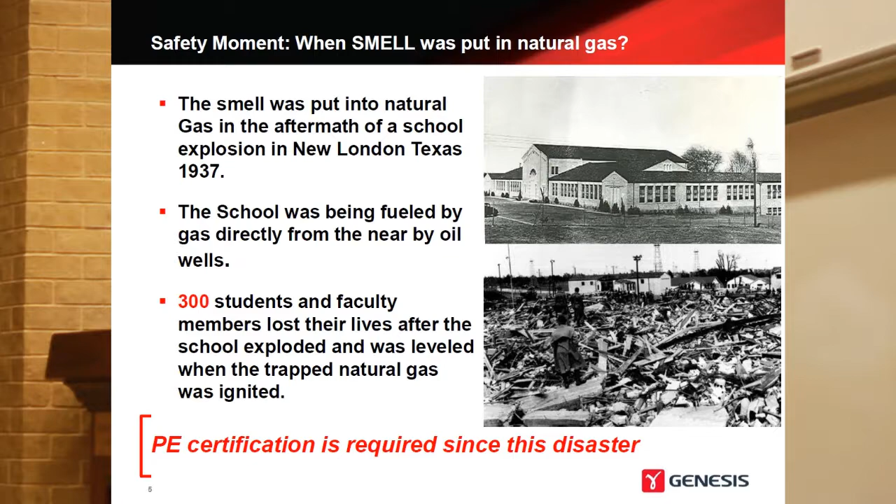It was London, Texas - New London, Texas, 1937. This is the high school before the explosion, and this is after the explosion. The school was fueled by gas directly from the nearby oil wells. That means there was a leak. Nobody smelled it, it got concentrated in certain areas, and then it got ignited, and you have an explosion. This is what happened. 300 people died. From there on, the Texas legislature, Congress, put in the Texas Engineering Act, and PE certification is required since then. Actually, nobody can be called an engineer if he doesn't have a PE here in Texas. Do you know that? Okay.

I can show you offshore accidents, the whole history, later on if you want, but we're not going to keep going with safety. If you saw safety back then, there was no safety at all. The job was done, and people were killed, okay?

This is a typical subsea development. You know what that is? What project is that? It's there, read it. What is that? For every question you respond, you get an extra ticket for the Genesis shirts, okay? The Genesis shirts are polo shirts. Let me show you that. Look, if you play golf, okay, nice. I have one for the girls, one for the boys, all right? So because we have gender diversity.

So what is that? What is that thing floating there? It's called what? Semi. All right. What are those things here and here? They call what? Say it again. They are planes, but they have a bigger name because it's where the wells are drilled. So it's called what? Drill center. Who said that? Okay, we have an extra. So Nebulisa, you need to give him an extra ticket. All right, so we have the drill centers.

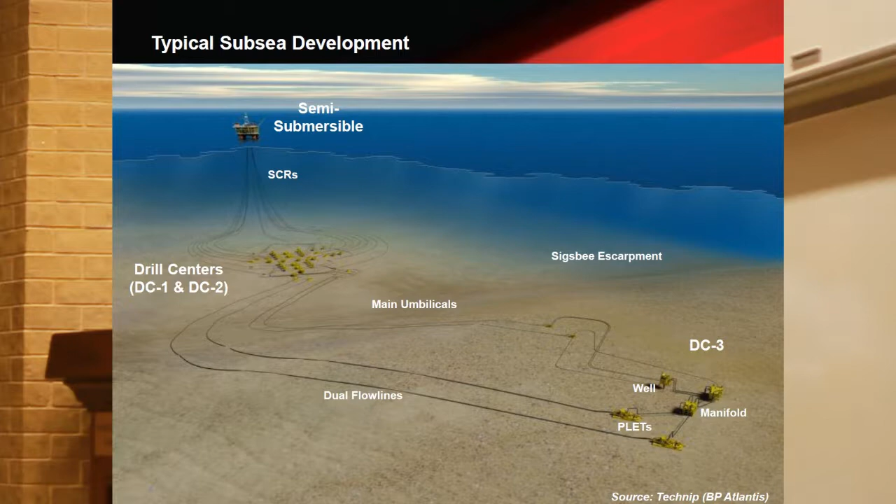There's two drill centers there next to Atlantis, and over the Sigsbee escarpment you have the DC3. These are dual flow lines, steel catenary risers, pipe in pipe, 1,800 meters water depth, quite challenging job. Wells and manifolds, and these are the umbilicals.

Subsea engineering, again another subsea project. You need to distinguish between, and then put together later on, the subsea production systems, which are basically all the well tubing and completion, the subsea trees and controls, the manifold and jumpers, and the subsea processing and boosting. All that is part of the SPS.

Actually, in the contracting strategies, many operators put that as a package, called package number 4, SPS, Subsea Production Systems. Usually their bidders are Cameron, Oceaneering, OneSubsea, Aker, GE, etc. And then you have the SURF.

The SURF part is whatever is left, and includes the subsea systems again, you know, umbilicals, risers, and flow lines. That's what SURF means. Do you know that?

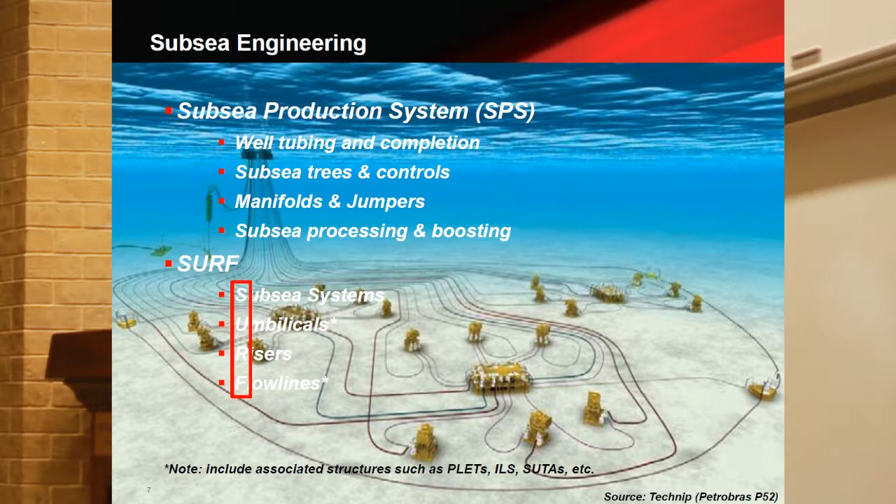SURF, they were very creative, you know, years ago about that, and actually they were trying to put the manifolds there in the SURF. But unfortunately, if they put the manifolds, what is going to happen is Smurf. And it wasn't like that, even though a few projects could be a Mickey Mouse project, could be a Smurf project, but it's not like that. So it's not a Smurf, it's SURF.

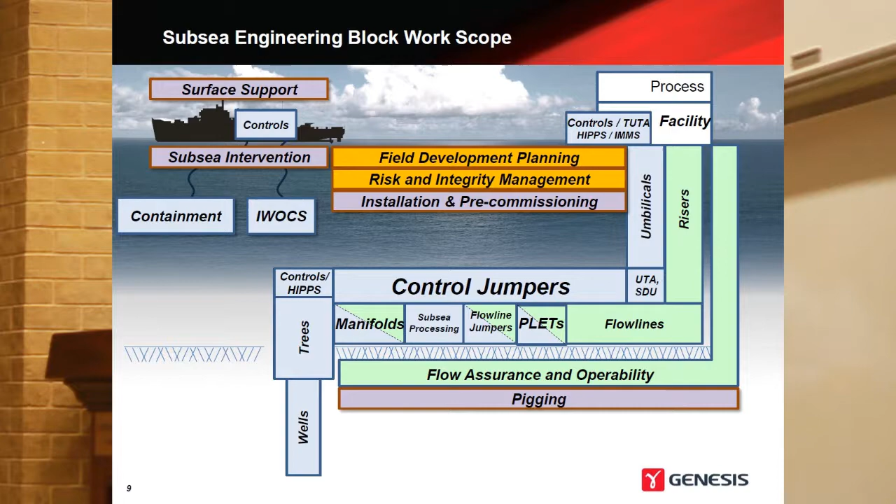This is basically the little blocks that you will have on any subsea engineering company for everything that is underwater, includes the production part, and the subsea intervention part with the workovers. You have workover risers, etc. For example, FMC does that, but they don't have drilling risers, for example.

Okay, having said that, you guys gotta tell me what upstream and downstream is. Who knows what upstream is? Upstream is all the exploration, production, extraction of the oil taken into the refinery, and downstream is when you take those hydrocarbons and transform them into something different, something useful. Do you agree with that?

Okay, so he said downstream and so we have 2 points here. So Nebulisa, he got 2 tickets. He didn't say only upstream, what midstream is, and it's correct. Usually the exploration, drilling, and production, and downstream refining, processing, and marketing is what that is.

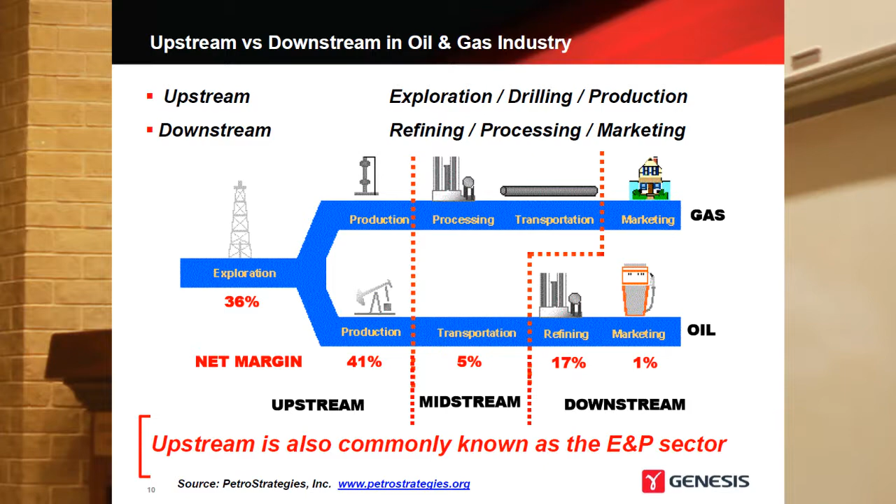Now, what is offshore and onshore? Offshore and onshore could be in the upstream business, because I can extract oil either from onshore or from offshore. Midstream usually is part of the downstream. Transportation, that type of thing is midstream, but usually we consider upstream and downstream. That's what you need to have in your minds.

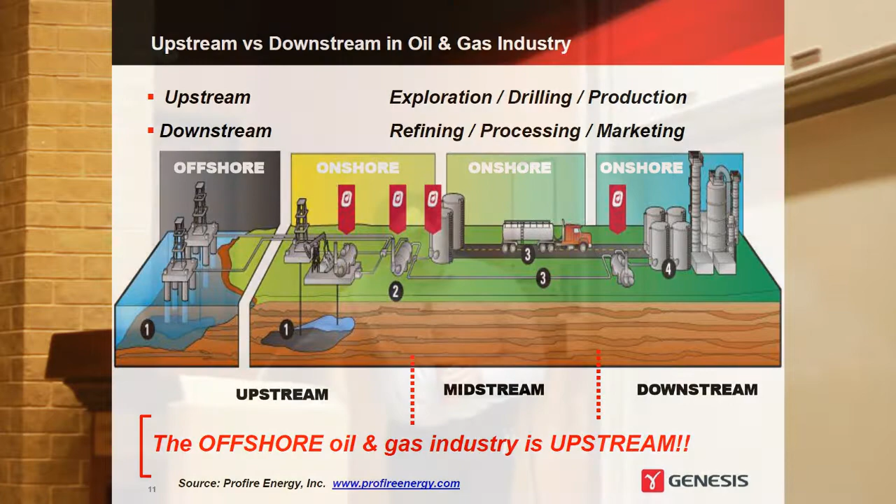And the offshore industry is in the upstream side, that's where we are. It could be some exceptions, okay? Somebody knows an exception of what the offshore... well, that would be kind of 5 points, but think about it. Could be exceptions. Everything that I'm saying is general, it's in the most general case, but could be something different.

So this is where Subsea is. Subsea is where? Exactly, it's underwater, guys. So that is a point for her. All right, so you give that to her, Nebulisa. And it's part of the offshore industry.

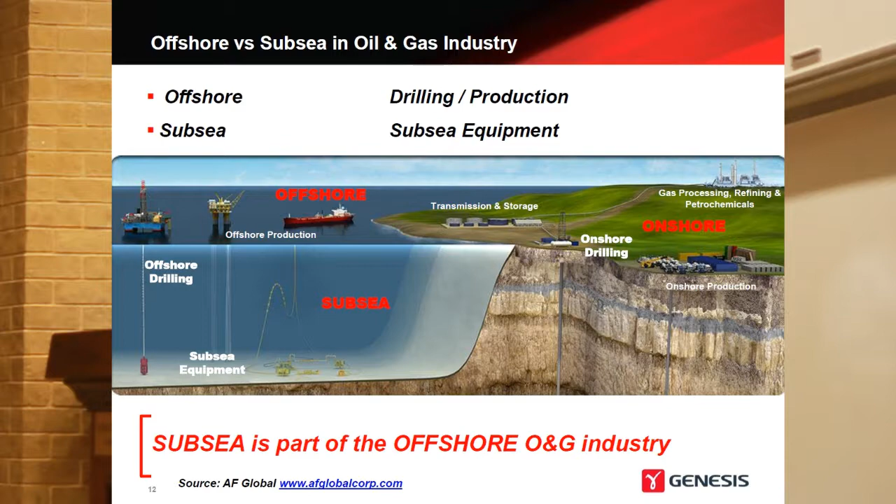I know that sounds dummy, but you know how many people think about offshore and onshore, and they forget what Subsea is. Then you have the offshore drilling, the subsea equipment, offshore production, transmission and storage, gas and processing as part of the onshore. Onshore drilling is part of onshore. So people get confused about what is onshore and offshore, and since onshore and offshore is in the upstream business, they confuse and always think that onshore is downstream. It's a typical mistake that people do.

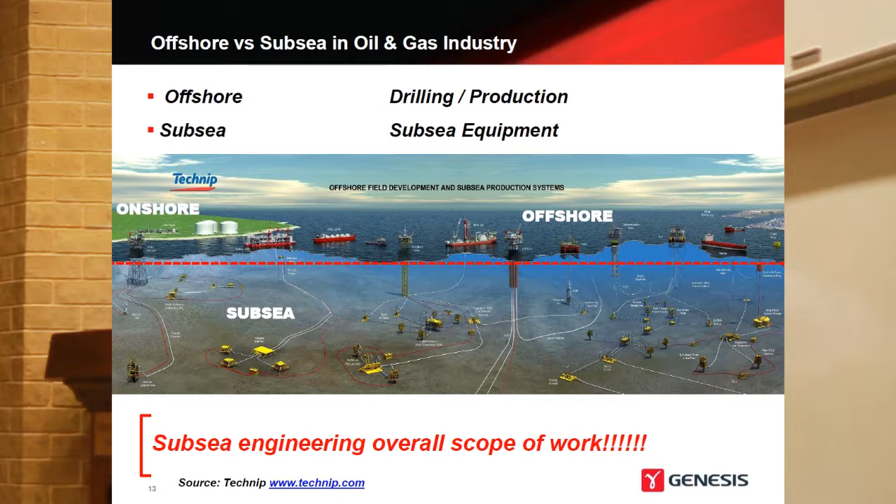And this is offshore and subsea. Again, going a little bit farther on this, this shows the subsea engineering overall scope of work. Actually it's a Technip selling picture, but it shows the onshore, shows the offshore, and everything that is underwater is subsea. So onshore, offshore, and here is what subsea is.

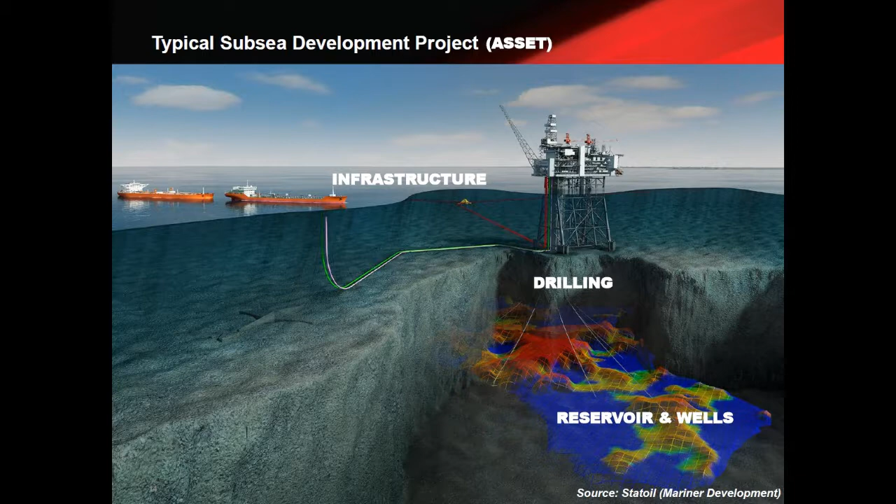So these are the three parts that you need to remember. This is the way the operators see, or they get a structure with: you have reservoir people, you have facilities people, and you have drilling. Usually the drilling, obviously they don't own the assets. The assets are the vessels, and they subcontract that. They get a drilling contractor to do that, but they need to supervise the drilling contractor, and they have specialized drilling people there.

Why? Because it takes a lot of the money that they're going to need to do this development. And this is what is called an asset for them. So they divide, they acquire data, they define the different assets that they are going to develop, and they go into reservoirs and wells, drilling, and infrastructure.

And they do that step by step. They start for the reservoir, they define where the wells are going to be, they drill an exploration well, exploratory well, appraisal well. They delimit the reservoirs, and they estimate the production profile of that reservoir. That is called the first reserves, it's proven or expected reserves. So there are different, it's 1P, 2P, and 3P reserves.

So they keep going with more, so they do that part of the engineering of the reservoirs and well engineering, and then they keep going, they get a drilling contractor, they do an appraisal well, and they keep going, and then they start looking at the infrastructure. So when they are finishing up, or in the middle of the reservoir and well process, they start with the production side, with the infrastructure, the facilities. They start that process on the facilities. So subsea engineering, most of the time, sees the infrastructure part.

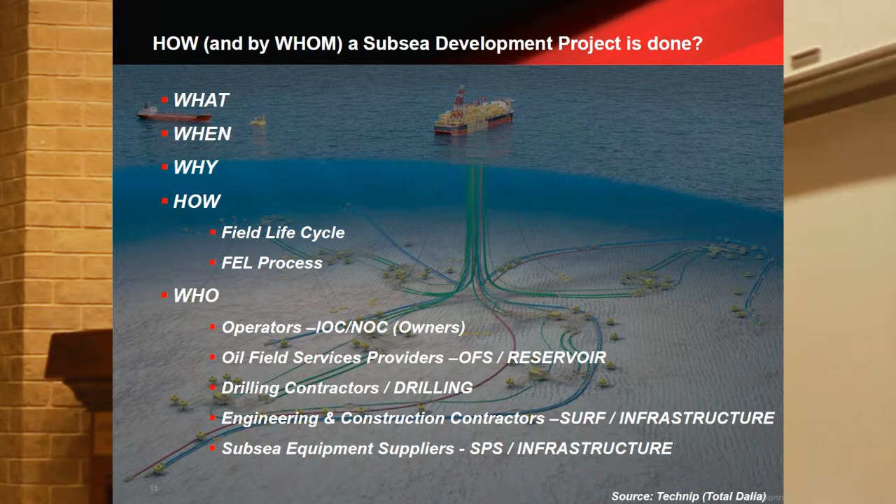What do we try to do with subsea engineering? What is the goal? Say it again? Okay, yeah, that's basically what it is: to extract the oil from underwater and basically develop or carry out a subsea development, develop the subsea asset, so that we have an extra point there, okay?

So when is it done? When and why? This is common sense, guys. When and why? Yeah, who said profitability? Okay, another point there. So it's profit. When? Who cares? It's when they decided to do it. Who decided to do that? We'll say that it's the operator.

But it's when and why, is them. So, and it's profit. But we're not here just to say what, when, and why. What is, we already showed that. When and why, it's what they decide. But what I'm most interested in is how and who. And by the way, this subsea development is Total Dalia, by Technip, West Africa.

So, how the thing is done, we're going to talk about what is called the field life cycle and the FEL process, or the project life cycle, which follows the FEL process. Do you know what FEL is?

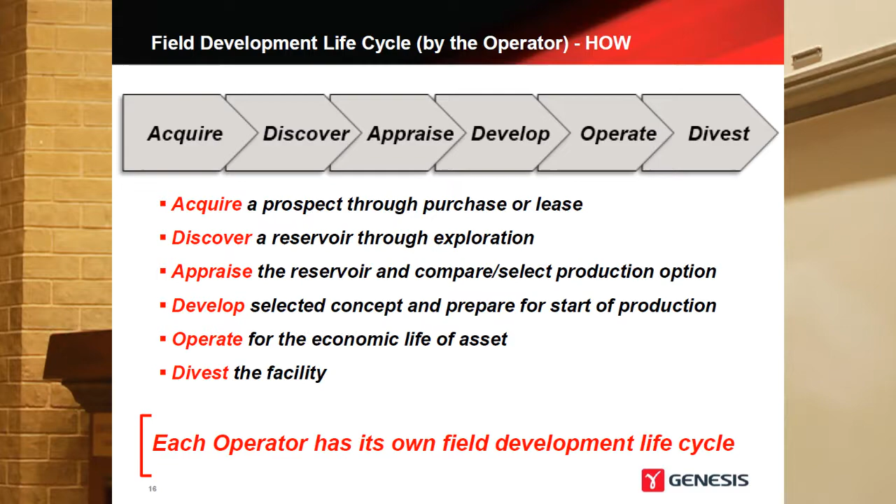So that's the way the operator sees that, and each operator has his own field development cycle. And this is when it comes to the interesting thing that you're not going to see everywhere else. This is the way different operators see this life cycle.

Let's go now on what is field life cycle versus the project life cycle. These names could be different, but always they talk about the same thing. And there are two things that you have, where you have the operating, the CAPEX of the, what is CAPEX?

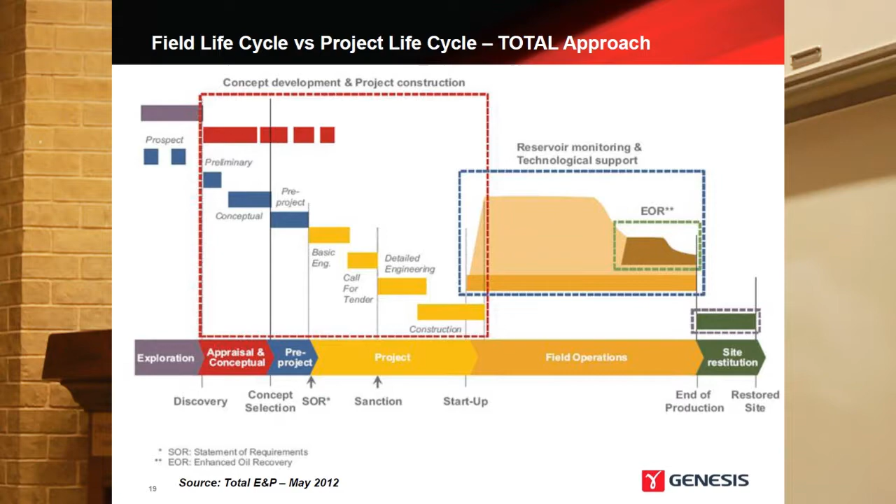This is the mindset for the operators, this is the mindset for the subsea engineering companies. It's the mindset, that doesn't mean that they do that engineering exclusively. The engineering companies do engineering for whatever phase they have to do. But you need to put yourself in the area they're talking about so you understand the picture. So in general, this is the mindset for the operators, and this is the mindset for the engineering companies. Obviously operators have an advantage over you if you've worked for a contractor all your life, because they have the picture and you don't. But the point is just to show you from now on what the picture is, so you can understand the way they think.

I like this one, this is the PEMEX approach. Same thing, exploration and production, and you have the basin and the prospect, reservoir opportunities, pre-FEL which is called pre-FEED, FEL, and you have FEL 1, FEL 2, and FEL 3. Visualize, which is conceptual. Pre-FEL is feasibility, they also call it feasibility studies. Visualization or conceptual? No, visualization is not conceptual engineering, it could also be feasibility studies.

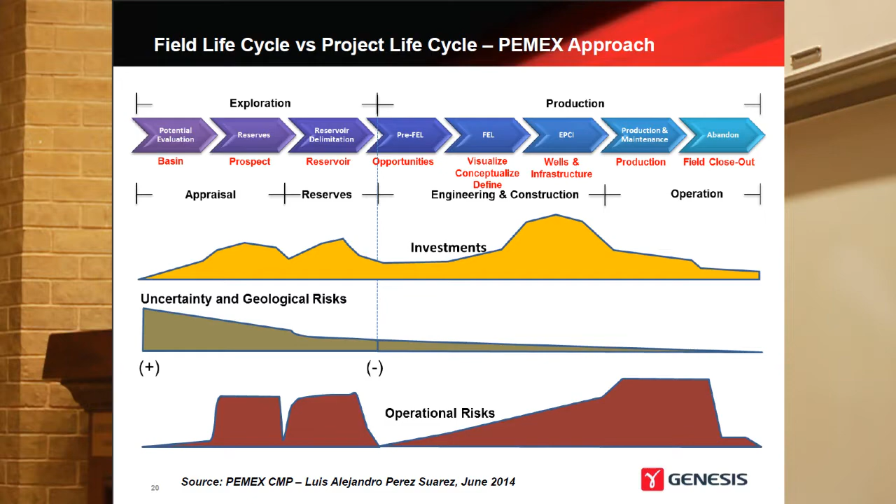Conceptualize is concepts, but BP sees this as selection, so they call it different. So even PEMEX calls conceptualize the selection phase that BP calls something else, so you get confused. You think conceptualize is the concept, but they call it visualize. Then define, everybody almost calls it definition, define the feed phase. And then it goes with the wells and infrastructure, that's an EPCI company doing that. And then production and maintenance during production, and then abandon.

And this is how the investments go. They do the wildcat, spend a lot of money, and then keep drilling two or more wells just to delimit the field. They keep going, and then during construction they spend the big money. And then during operation, up to here, what you have is CAPEX, and from there on you have OPEX. So what is CAPEX and what is OPEX? You need to understand what is what. This comes up to here, and during operation is operational expenditures.

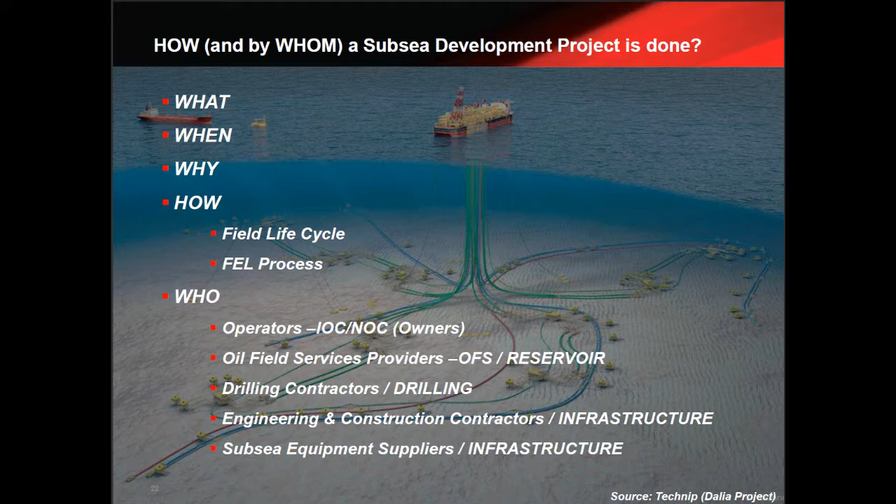And these are the uncertainties, how they go. When you start, your uncertainty is quite high, and as you develop whatever engineering or project you're doing, your uncertainties and risks go down. That's the idea. And these are all the operational risks usually associated with the big assets you have on the field. Whatever you have floating during a project is where you have the big operational risks. So here are drilling rigs floating on the sea.

So that was the sales speech. We keep going, we stop where we have to stop. If you want to continue, we continue. You tell me, this is quite simple.

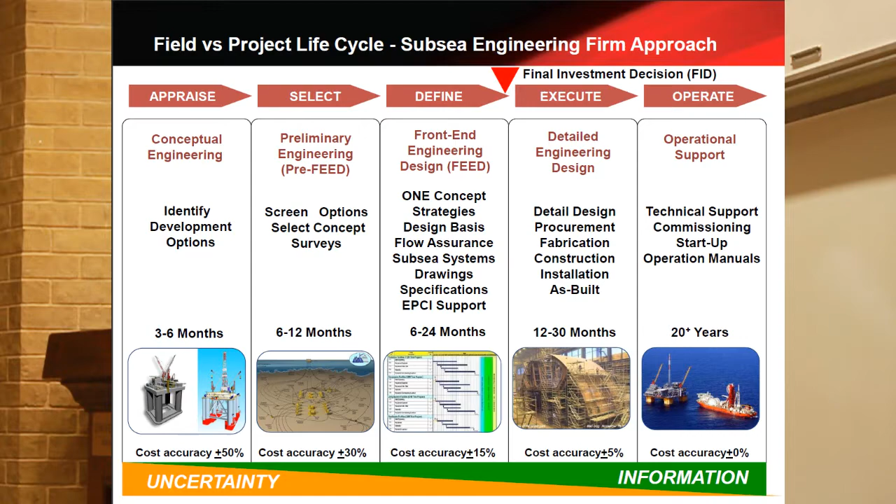The way any subsea engineering firm sees the project life cycle versus the engineering life cycle, with each phase being conceptual, pre-feed, feed, detailed design, operational support. Here is usually the months, the time it takes for each of those. Conceptual engineering, 3 to 6 months. Pre-feed, 6 to 12 months. 6 to 24 for define. Usually the operator says 3 months for appraise, 4 months for select, and 8 to 12 months for define. They want everything for yesterday, so that's where it goes.

But what's important when you do engineering, and you need to keep this in mind, is that whatever level of engineering you do is associated with a cost estimate. Because whatever phase in that cycle it is, the operator wants to know how much it's going to cost - that's the CAPEX.

This is the cost accuracy that you have for each phase: plus minus 50% in appraisal, plus minus 30% on pre-feed, plus minus 15%, and plus minus 5 to 10% in detail engineering.

I have another chart that shows how the standard goes with the cost estimates.

But please, when you do engineering, situate yourself in the phase of the project. Because if you try to do everything up to detail, there's no point if you are in an appraisal phase. It has to be something like this.

Your engineering has to be associated with time management, so you do your engineering according to what is required. If I said I want this done in 40 hours for an appraisal, that's fine. But if I'm going to do detail, maybe that takes a month and a half. Every engineering task is associated with a certain phase and a certain level of effort.

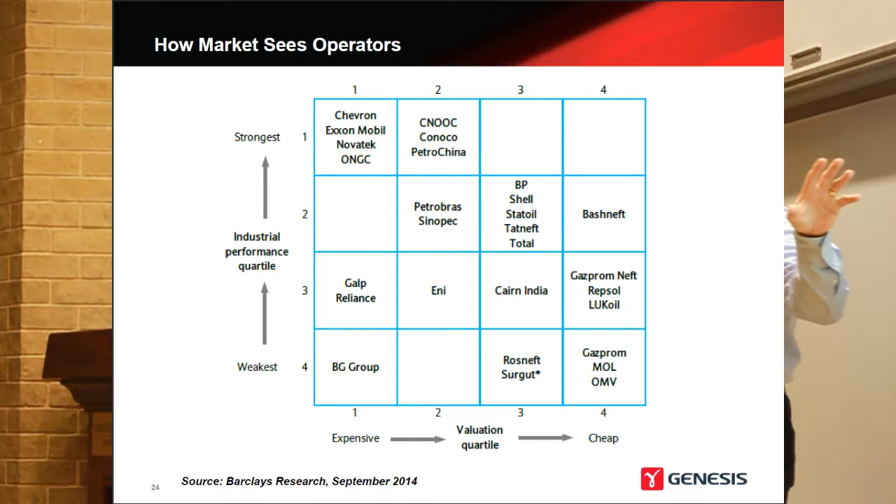Unfortunately, since everybody has a share or is in the New York stock market, those guys tell you, oh, my perception is that Shell is doing quite bad, and it's going to happen, and they spread a rumor or something - and those are guys maybe 22, 23, 24 years old, brilliant guys, but they haven't worked in this industry at all. But they see the numbers, and it's amazing how they decide a lot of things about what is going on in the market and the share of these companies.

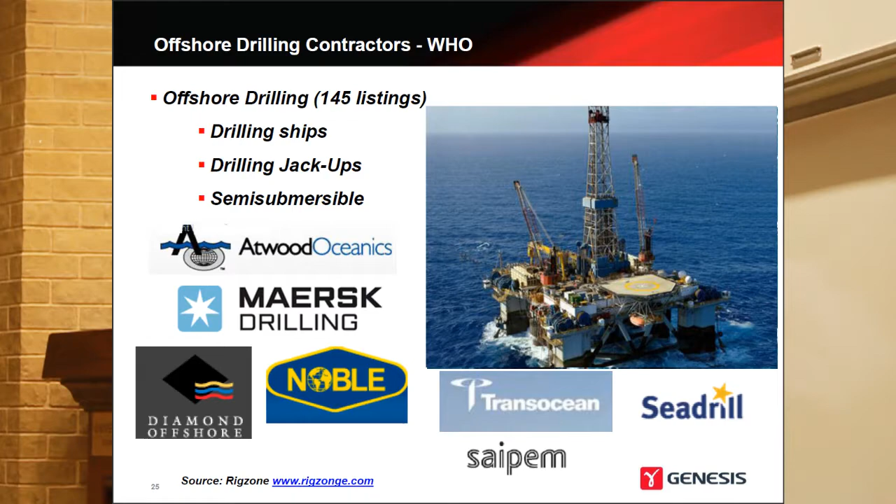And these are the big ones - I put as much as I could, but there could be maybe thousands of these companies - no, not thousands, hundreds. So, Transocean, well known for Macondo, and Saipem is also doing drilling, for example.

You can search it out on the web, there's a lot of stuff regarding that. These are the big three, the most important ones: Technip, Saipem, and Subsea 7. And this is the Petrofac new vessel that can do J-lay because of the tower here, and also S-lay.

This is from 2010. It's quite old, but it shows where these companies are located, the high technological assets and the worldwide operations. This actually didn't come from Technip, it comes from CECON, a company in the North Sea. And you have Acergy here. Acergy doesn't exist.

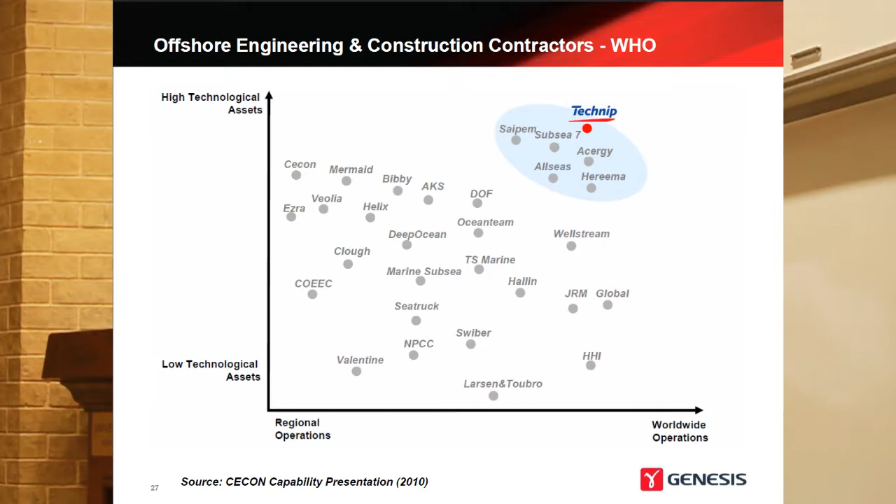Is Acergy in the market? Who knows that? Well, Acergy is not in the market anymore. In 2011, it was merged - Subsea 7 bought it. Global is not in the market anymore either; in 2011, Technip bought it. And now we have alliances with Technip and Heerema. Usually Saipem and Subsea 7 could be together in some bids, and Allseas with McDermott also can be there.

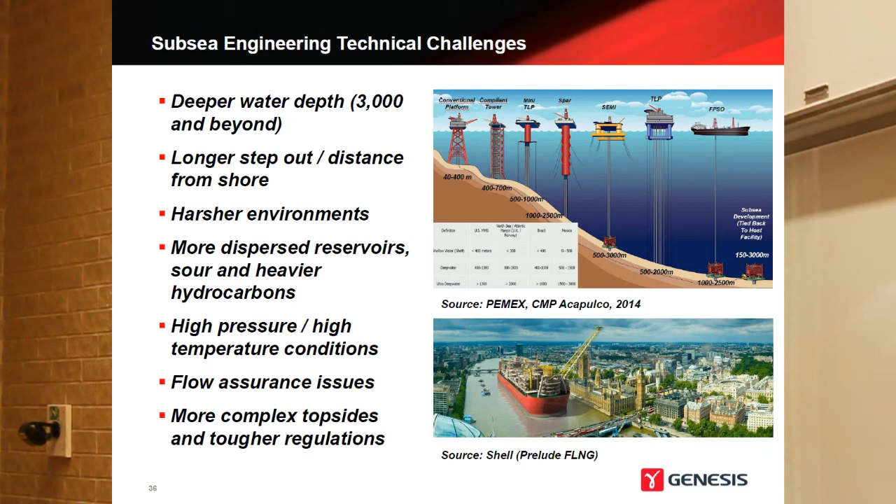And what is deep water and shallow water? When I started, 300 meters was deep water. Chaco, when you started, what was deep water? Nothing was deep water - yeah, nothing but the sea was deep water.

What's it going to be in 20 years? I copied and pasted this from Chris Tam's presentation - it's on the web anyhow. I like it, I know Chris. I hope he doesn't mind me showing this to you guys. And this is what is happening, this is where we're going.

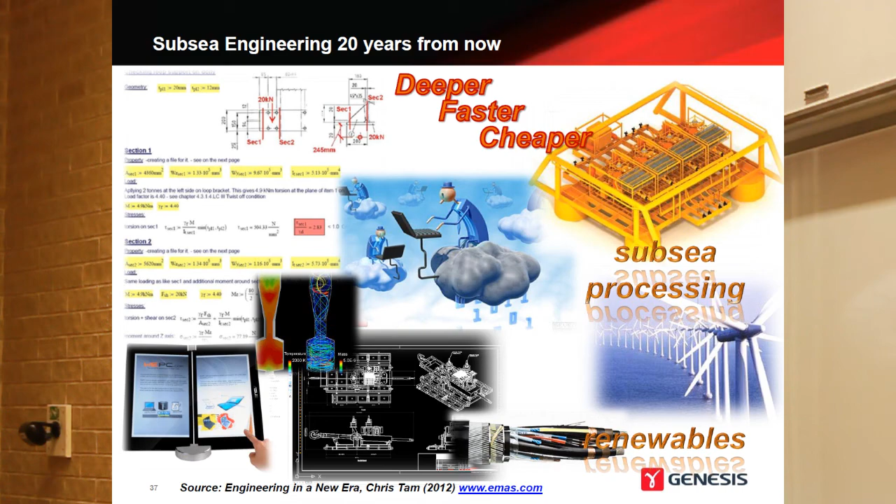I don't know, maybe - look at this guy in the sky, working with that. I don't know where we're going, but it's not like 20 years ago. People try to do a lot of analysis now, a lot of ABAQUS. We need to think about good engineering judgment also.

Quiz - oh, we're at the end. So, the question is: what is offshore? What is subsea? And what is onshore?

Go to the Subsea Oil and Gas Directory now and take a look at that with all the stuff we said today, and see if you're going to be able to break it down much better than yesterday. If you can do that, I will be more than happy, and this lecture, or whatever you want to call it, was appropriate. That's all.